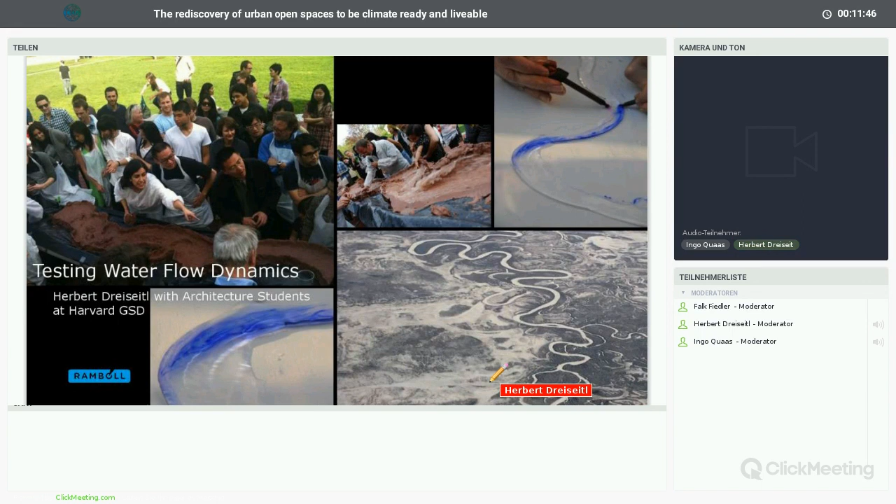Resiliency, what we are talking about today with being climate ready, is something we can actually learn from a very natural way of how water is streaming and creating a balance between too dry or too wet. It creates a kind of retention system. Rivers are never straight, they take a very long way. And when you look into the landscape before we get to solutions, we can see that landscapes in general have a very resilient structure.

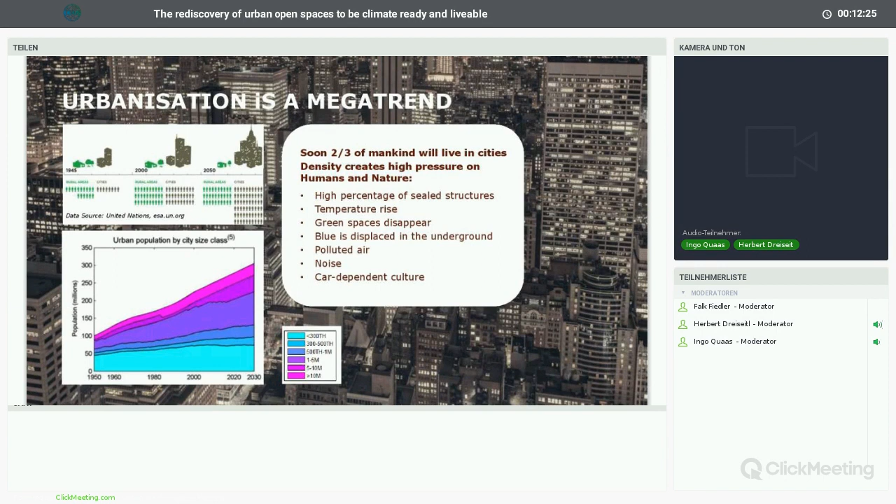Today in our cities, we have lost this intelligence of nature, and it's very interesting to adapt this logic we see in the natural environment and bring it into our cities. The big challenge, as we know, is that more and more cities are getting more dense, with more people living in cities. So there is a conflict of space, a conflict of using this space in a smart and clever way.

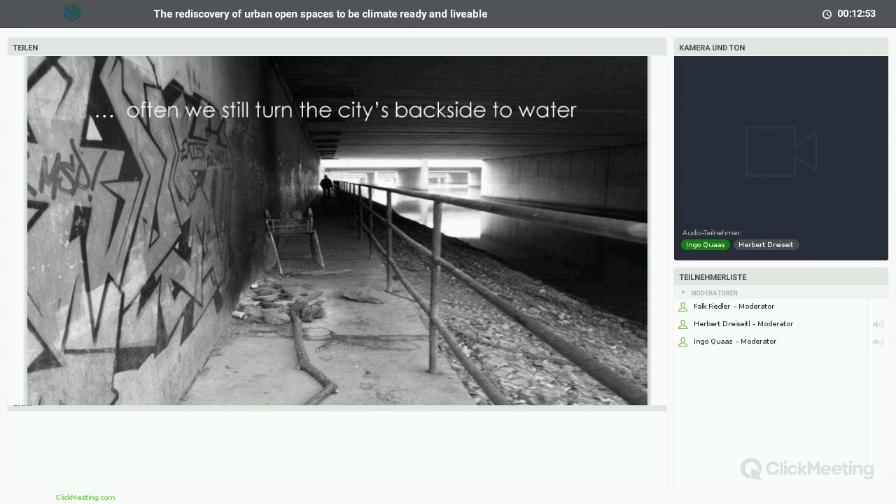It's often that we put the infrastructure, and of course the value of water and green, to the backside. It's something nice to have, but if we don't have the space, we ignore it or push it to the backside. I know that we need a totally different way of working, much more in partnership with the environment, even in our dense cities.

And the logic is very clear. If we look at the water regime of a natural environment, there is a lot of evaporation, a lot of cooling effect. If we go to agriculture, if we go to the urban fabric, we find direct runoff, a lot of pollution going into rivers. Especially here in the US, we have combined sewer overflows all the time, bringing pollution into our streams and rivers. We actually lose a lot of fresh water, and that is a real problem, a real dilemma.

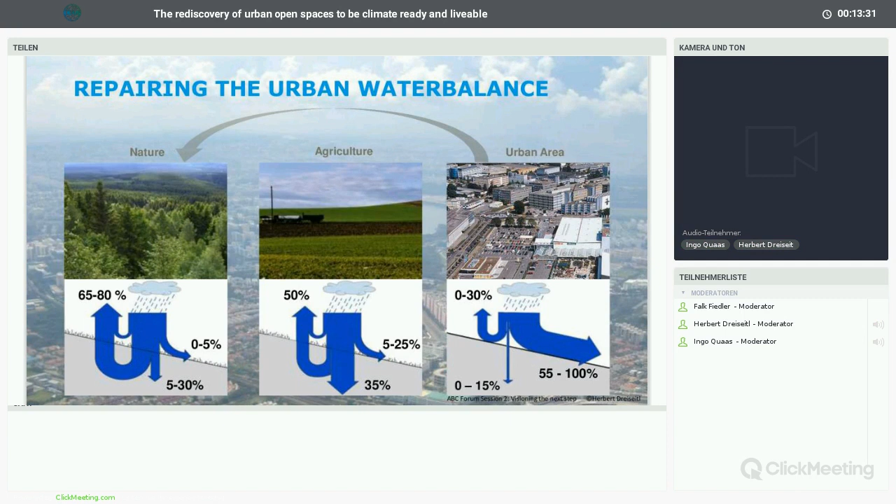If I may talk a bit about climate change, also from a US perspective, the average of all the research around the world is actually coming to the same conclusion.

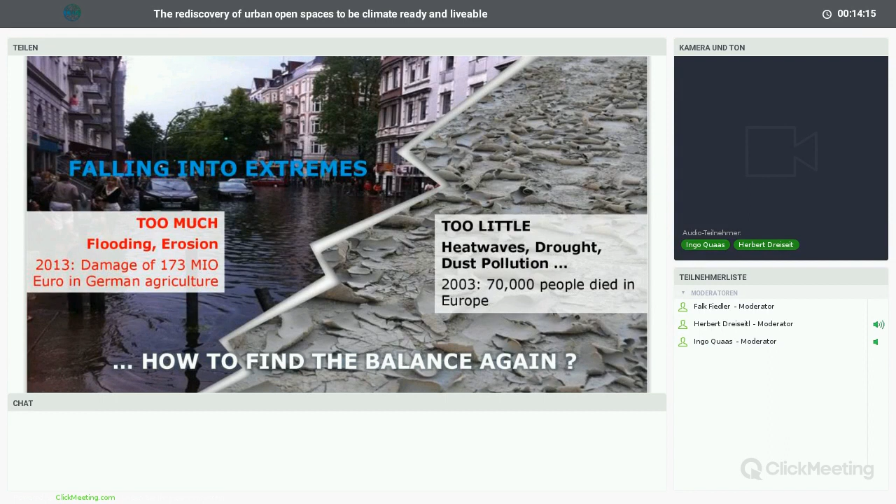Very often the average of rain is not so much different, but the intensity is changing. So we have, for example, on one spot an enormous amount of water coming down, and other parts with no drop at all. So we have to balance this much better. And I think this problem about going into the extreme in our cities is a very specific topic, which is also what people actually feel and experience in mega cities. And we have to find better solutions to that.

I'll give you one example. In front of my own office in Boston, we had four extreme storm events in a row this year, and we had the highest water level ever measured in Boston. It was in front of my office that the streets, the ocean came so high that the front part was completely covered with seawater, and it was so cold that some of the cars were frozen in this ice water.

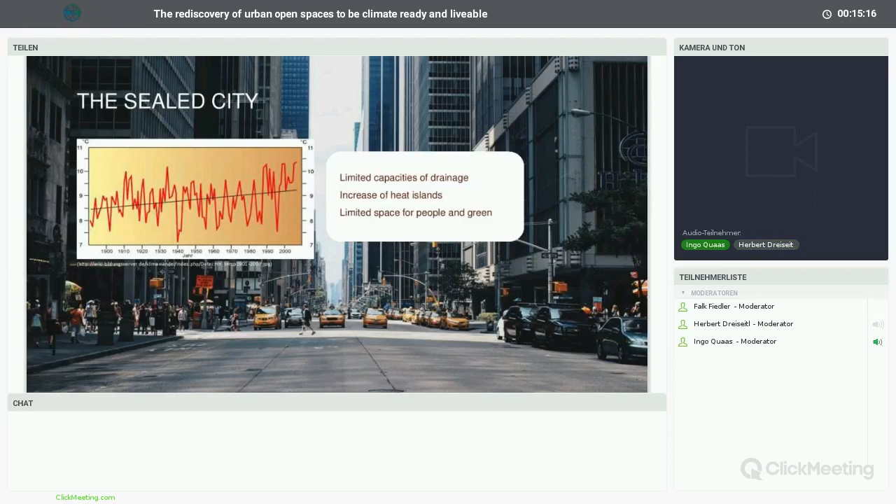So the reality about climate change and also the extremes we have, this is not something for the future. This is something which is actually happening right now, and people can feel that. So we have to find much better solutions. A lot of challenges are not only about too much water, also too little. Heat extremes in the US, we have the problem that we have air pollution, we have noise pollution. There's lots of things which are all reasons to create more healthy cities and to integrate better the water system.

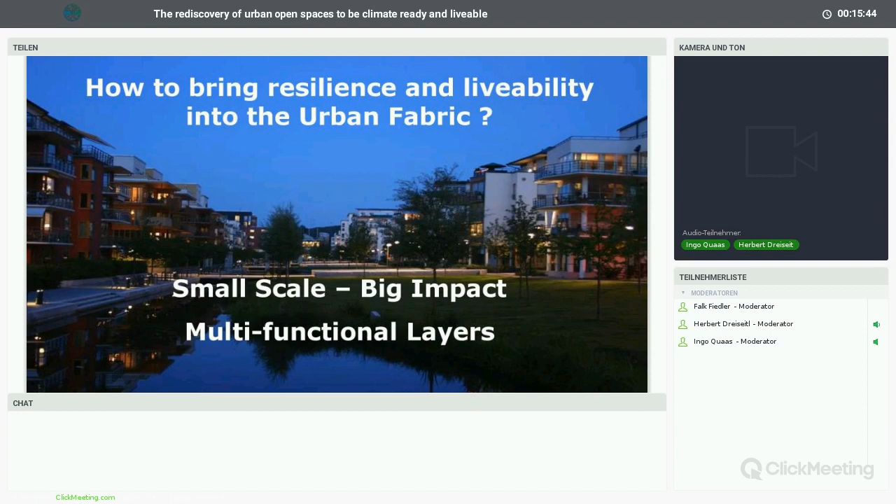I would like to give you some examples, maybe about our research and our attitude, how we work in this field. We're trying to find solutions on small and large scale. And actually what it is about is using any opportunity in a city, whether it's a little pocket park or a large infrastructure, or also streets, to be more adaptive, more resilient to what is happening and to balance the extremes.

For example, instead of using everything underneath in pipes, to use the city in itself, starting from the rooftops to the street scale, also very often small scale projects, to do the homework in front of our doorstep and not to put everything at the end of the pipe solution. So that is a very important part I think we have to come up with.

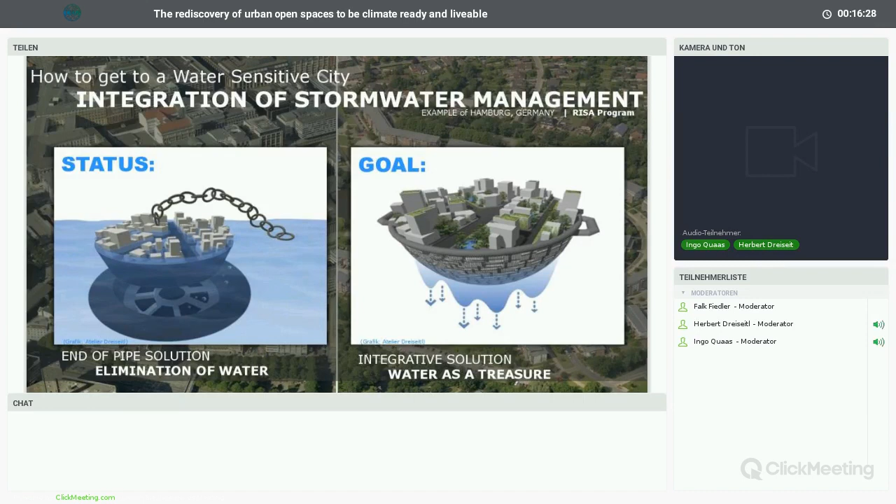And I'd just like to illustrate this very simply with some graphics. The traditional gray engineering is basically: we want to get rid of water, we want to bring it into pipes out of the city. We have treatment maybe at the end if it's a combined or separated sewer system. And we use basically the city as a drainage system to get rid of water. I think in the future, we have to get a more integrated approach, to decentralize our systems and to use the intelligence of nature and bring it actually back into our cities.

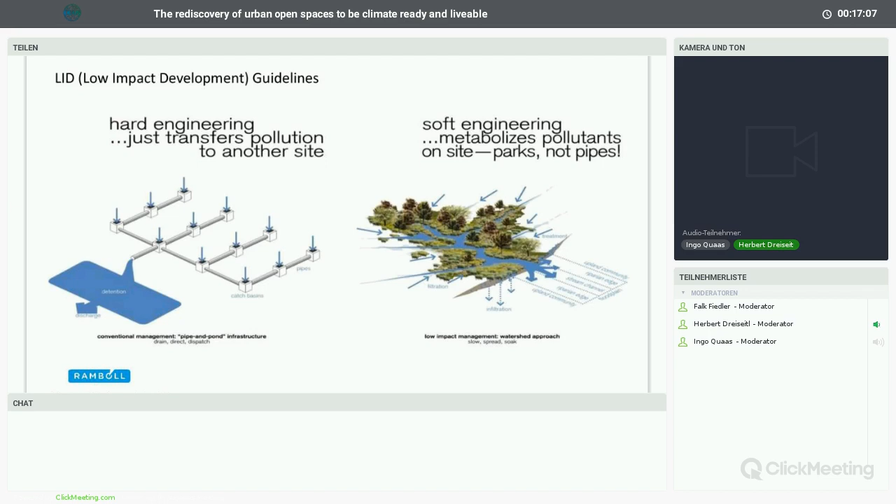Let me just explain that very simply with one example. I take here Singapore. I was very influential in Singapore for the ABC water guidelines, and our entire team was very intensely working for the last 10 years in the city. We came up with basically the guidelines for the entire city. What we are trying to do is collect every drop of rainwater in the city, bring it not only on the surface, but also treat it in different ways. We'll come to that. But collect it, and also store it, and recycle and reuse it.

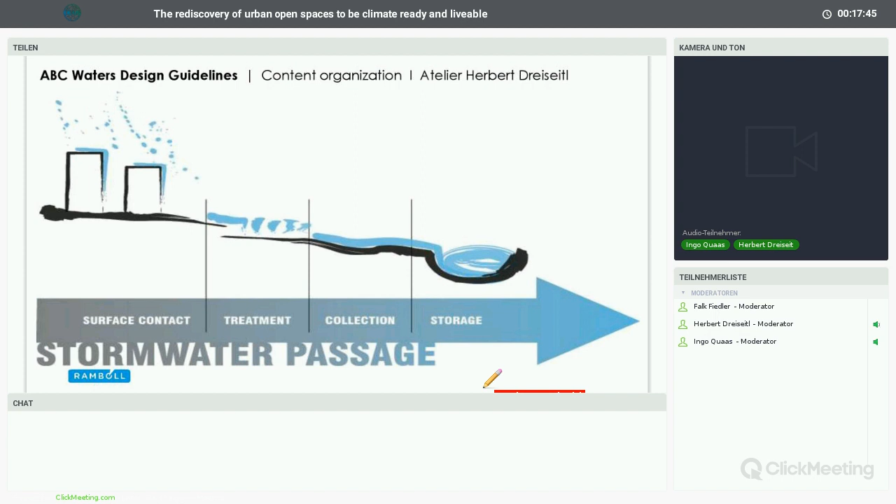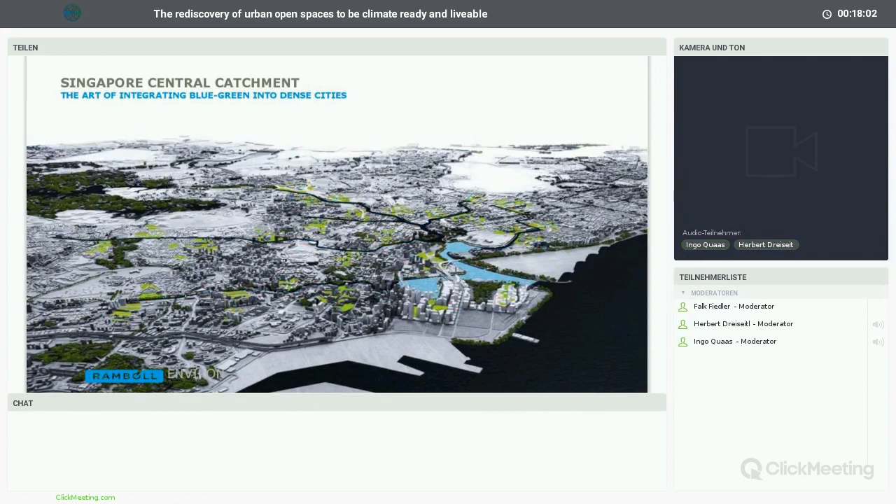Singapore is doing a big job to collect every drop of rainwater in the city and is using actually every drop in the city as a capacity to finally bring the water clean into a lagoon system, and from this lagoon system we use it even as a drinking water capacity. This is something which has to be done now on many different levels.

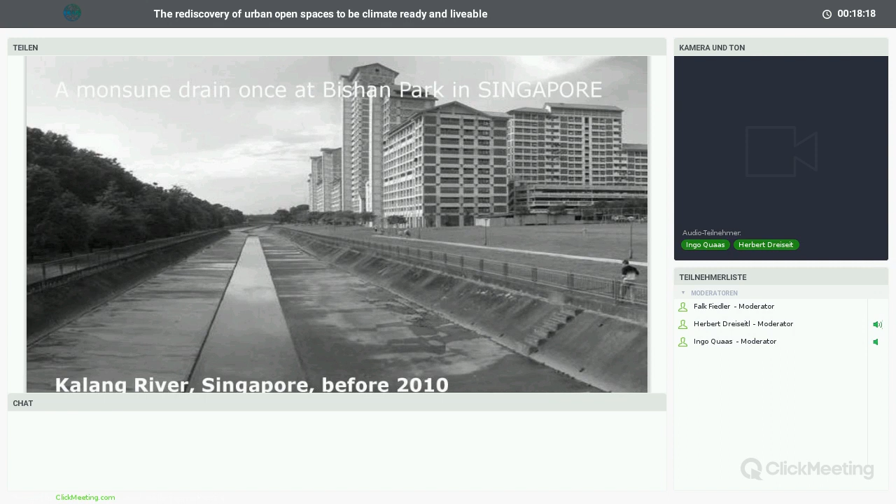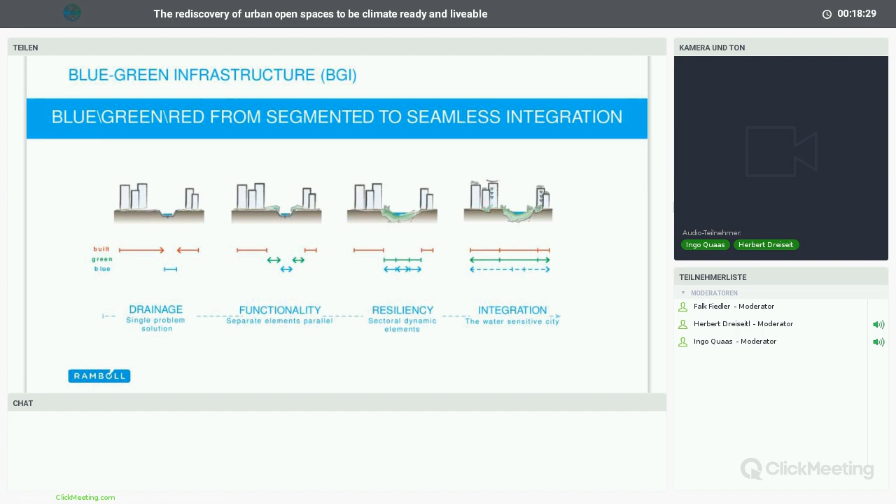The ABC water guidelines in Singapore start on reopening and changing canals and streams, and I'd just like to mention a bit about how we do that. Instead of having everything in drains to get rid of the water as quickly as possible, we have to get to a more integrated approach. And we have to find any opportunities, starting from daylighting forgotten streams, bringing them into the city in different ways.

And that means we also have to create ways to really make from concrete gray solutions a more integrated blue-green solution. In this case here in Singapore, we even start to use a lot of different parks and open spaces. We recycle material and reuse it, for example here. We bring bioengineering techniques, which we also use a lot in Germany on restoring streams instead of concrete, to use living material and plants to stabilize and avoid erosion.

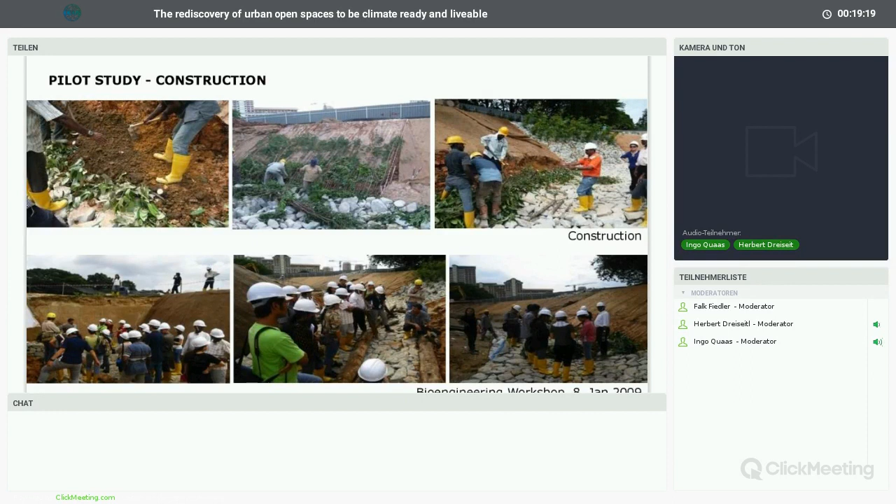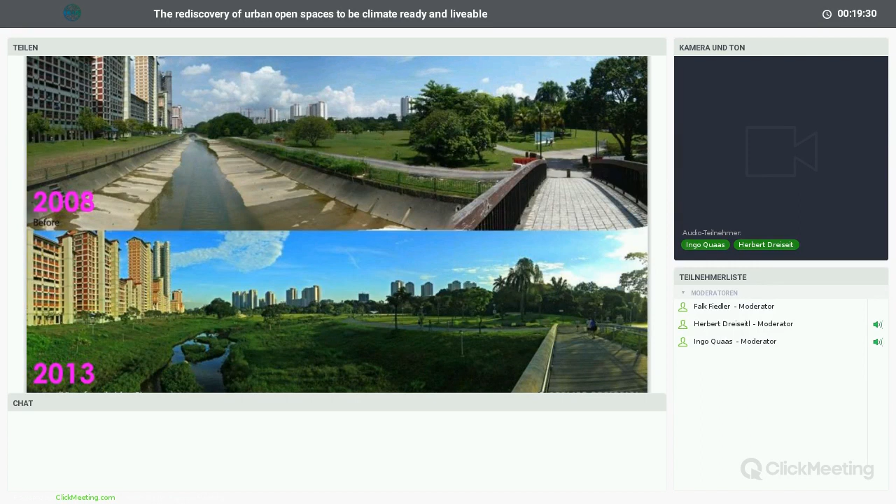We are doing this on a large scale here in Singapore, and we actually change a lot of these infrastructure systems completely from a gray to a more integrated blue-green infrastructure. Well, this has many effects. On one side, we can hold back an enormous amount of water when it starts to rain. Singapore has monsoon rains which are unbelievable, nothing to compare to our normal big rain showers we have maybe in Germany. We have to capture this water in the city and slow it down. The side effect is also that the city gets much better from a climate, microclimate aspect.

People really love this kind of environment. I'll give you some impressions. This is after a big storm event where we can actually flood the entire region. We have a special safety system so that people actually leave this place and go out.

We use the city park as a big retention and detention facility to slow down the process. Two days later, this can be used again—it's a multifunctional, flexible space where people get close to water and experience its beauty, so people aren't only afraid of infrastructure and hiding everything away, but integrate it into day-to-day life.

I'll give you this example. A lot of people who grow up in cities, children, have very limited access to the natural environment. They live in air-conditioned systems, indoors. It's so important for them to understand how a natural environment works, and how we can make our city more sustainable and more livable.

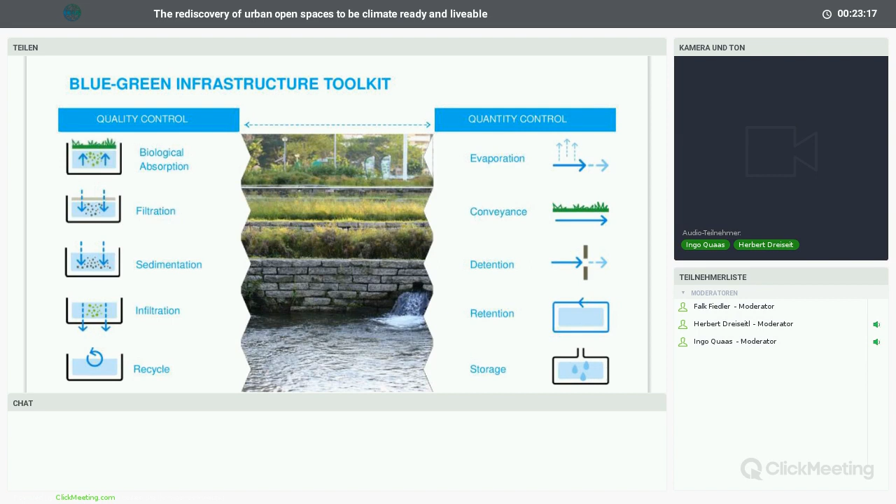A little more from an engineering point: there are lots of ways to work better with water and with engineering solutions. There are always two sides of the coin—one is working with quality, one is working with quantity. We have many opportunities, not only in parks but also on buildings, to work more strategically and cleverly to bring together functions like filtration, sedimentation, conveyance, slowing down the process, and storing it. I'll give you one example.

You can start on buildings, and we've done that at large scale. I worked with Renzo Piano on Potsdamer Platz in Berlin. What most people don't know is that this was, at the time, the largest project in the world for an integrated stormwater and rainwater management system in a city.

At Potsdamer Platz, we have more than 50% green roofs—extensive green roofs—where we start to filter water. From there, the water goes into cisterns, and we recycle it for toilet flushing, for shopping malls, and for greenery.

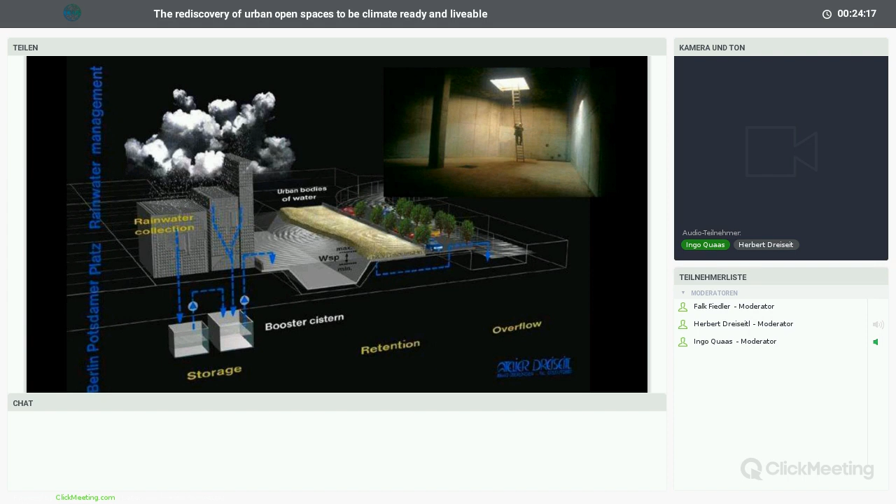The rest of the water goes into a lagoon system. The lagoon has flexible water levels: when there's a lot of rain, the water level goes up; in a dry period, it can go down. It's a very interesting and efficient way to hold back and use water more carefully and make more sense of the environment.

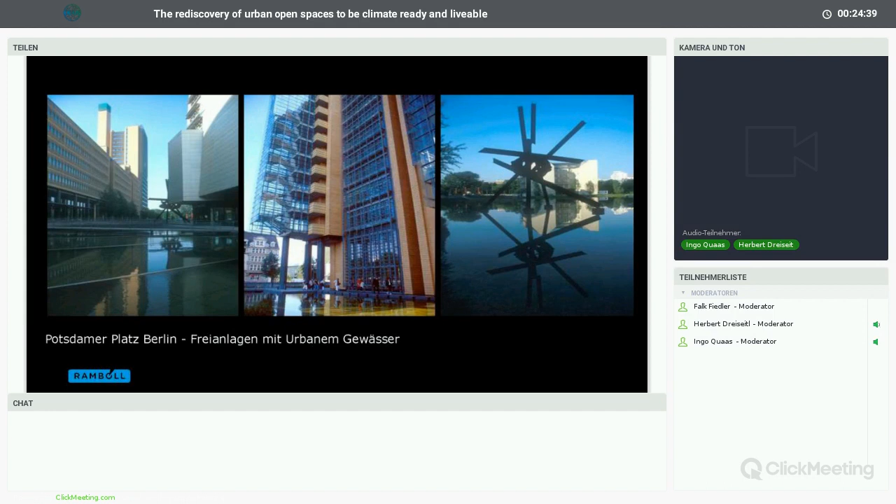Potsdamer Platz has, of course, a very extreme design solution—you can't do this everywhere. We have open lagoons fed only by rainwater, with a special filtration system where we circulate the water in summertime. We don't put any chemicals into it; we use the natural filtration system instead.

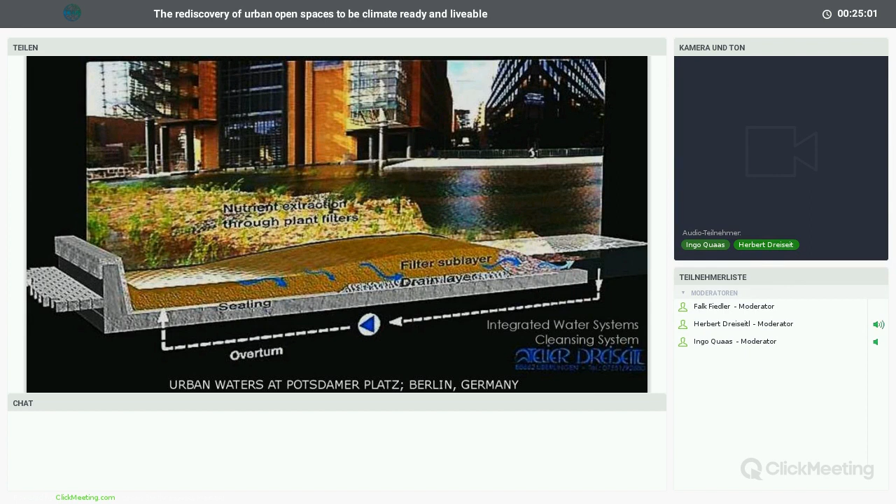It's a cleansing biotope, where the water is filtered through a substrate, and the plant material and root system, along with microorganisms, do the job of cleaning the water.

This kind of integrated approach can also be beautiful, and that's a very important part. That's also what we try around the world when working on brownfield solutions—to celebrate, not just have technical solutions to solve a problem, but to turn the problem around and make it a solution that brings new possibilities into a city.

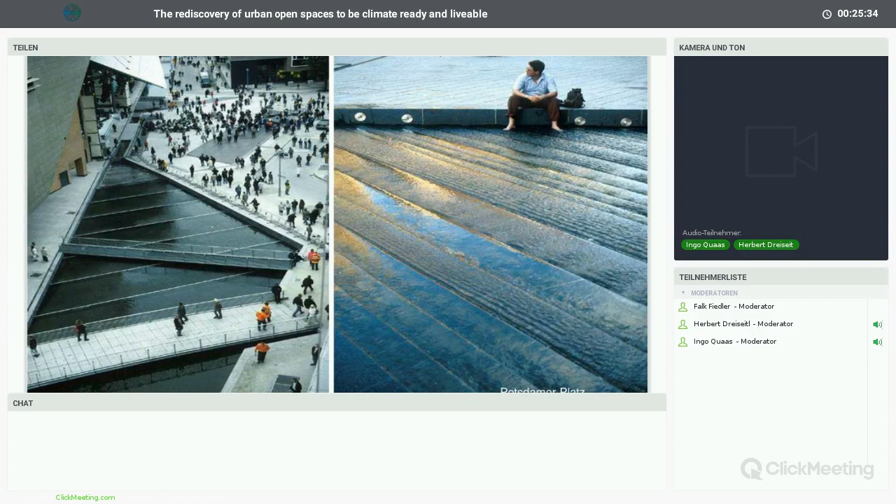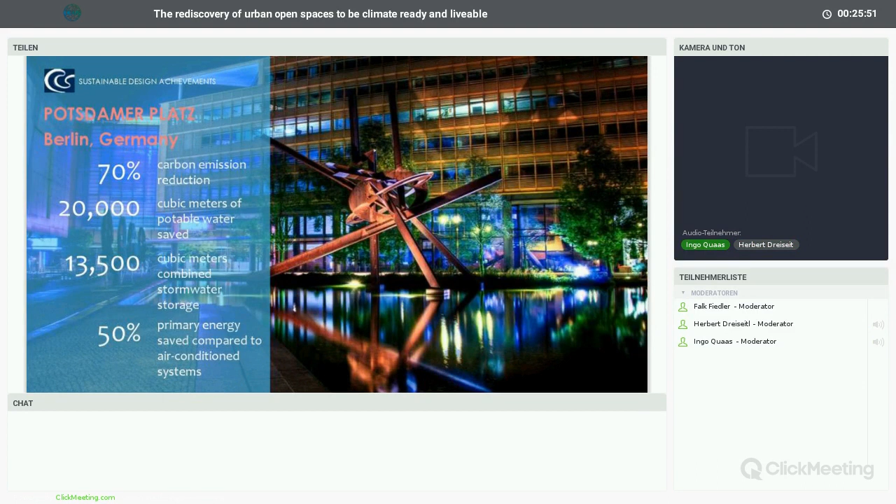You can do so much better, bringing beauty and engineering together, being smart about energy, combining recycling systems, and reducing the carbon footprint of our cities.

I'll give you one example here from Tanner Springs Park in Portland. That was also a pilot project. This was actually very much a brownfield site.

Portland, a typical, very interesting city in the US, one of the most green cities in the US. They had a town center, the typical grid, and a big part of the city that was totally just industry, rails, shops, and so on. We changed that Pearl District completely, and I'll give you one example of what we did.

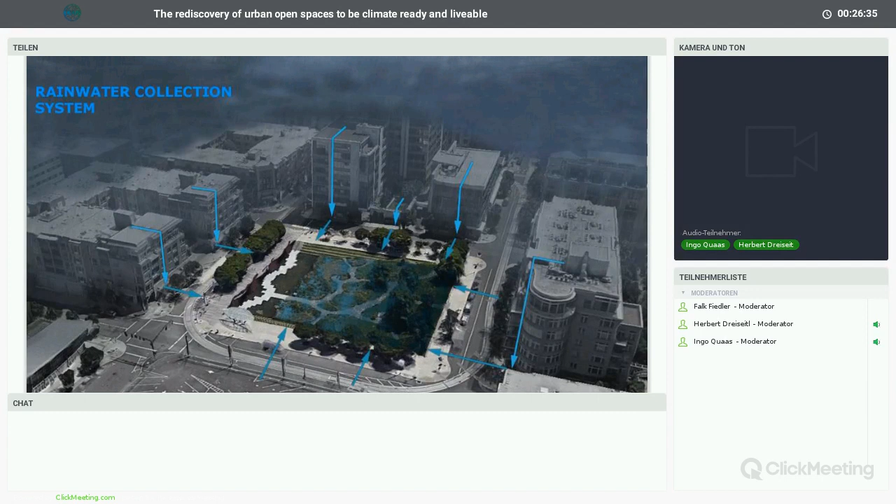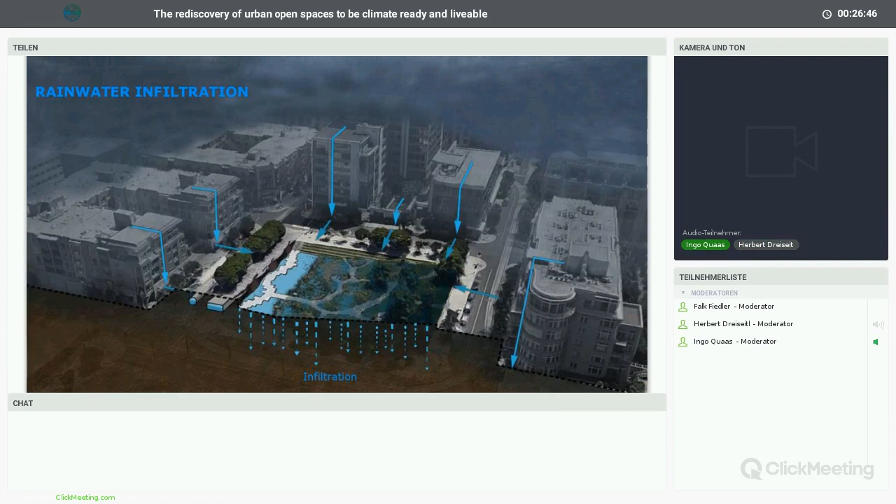All the new buildings, and sometimes also recycling of old buildings, are collecting and capturing water, and we bring it into a public park. This public park has different functions, of course, evaporation and infiltration, and we can circulate the water in this park, and finally we bring totally clean water out.

What is very important on such projects, because it's the public realm, you have to get the people on board. This is something I've been doing with my teams for many, many decades and years. We try to involve the local people in the decision, even in the design process.

Here's a stakeholder involvement project where we had 300 citizens from that area. We had an open workshop where we created a kind of vision for the future of this Pearl District with the local people.

If you involve people, not just giving a nice show, but really let their voices, dreams, and visions come up in discussion, and empower them to be exposed to new ideas and also create new ideas, you will have a much better political background. That is very important for politicians to make decisions, and also very important for stakeholders to be involved and to finance such projects.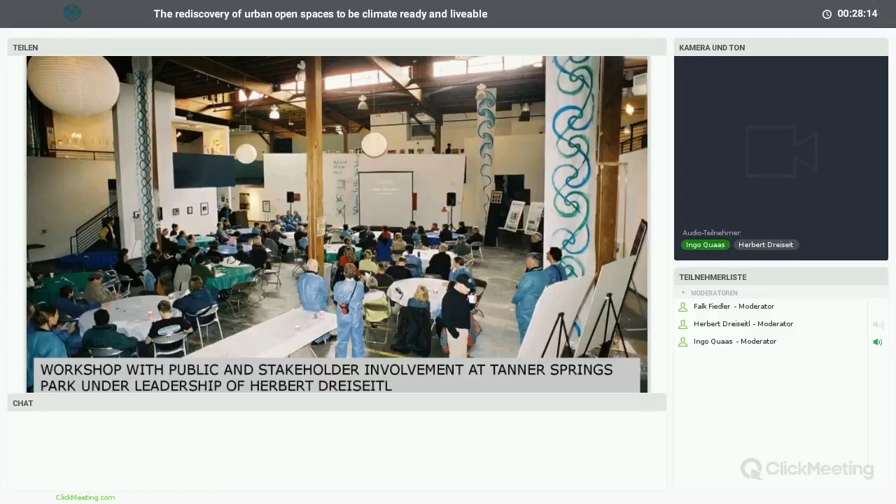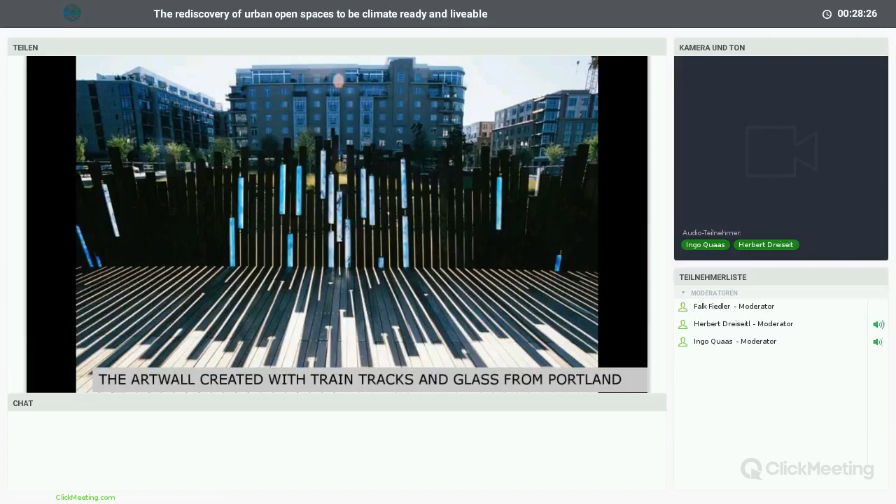There's a lot I could say about that, but I'd just like to mention that this project was very much about stakeholder involvement and city involvement. We even recycled a lot of the material, including the old train tracks, turning them into an art piece.

People love this park. People have taken ownership. Interestingly, there's a whole group of volunteers who clean up the park, so we have much less maintenance costs than other parks. Teachers are using this for open classrooms, like clean, green classrooms outside.

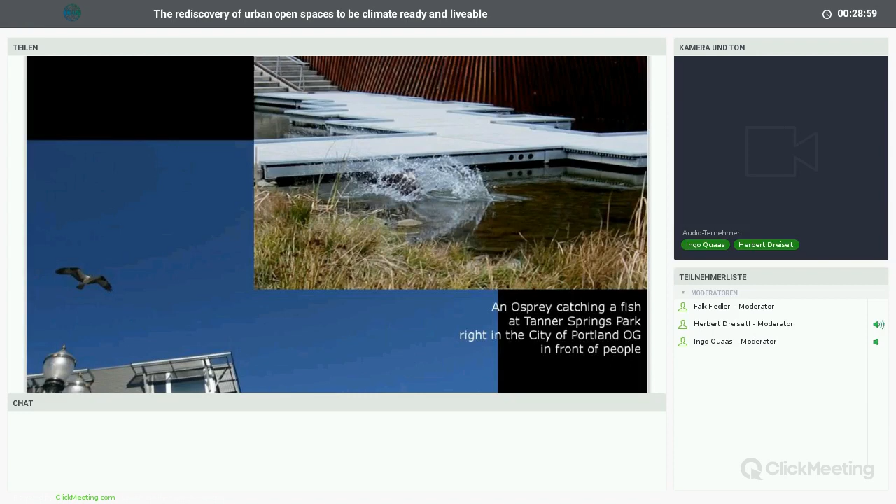We can even find ospreys catching fish in this park. So it's a very interesting way of bringing a modern park and also nature back into the city. You can even see art performances on weekends sometimes. It's a very dynamic and interesting integrated solution.

Finally, I'll give you a short intro about what we do with solutions based on cloudburst projects. We are working here in the US on integrating engineering solutions, like here where we're working for New York City, for Queens, to come up with integrated approaches.

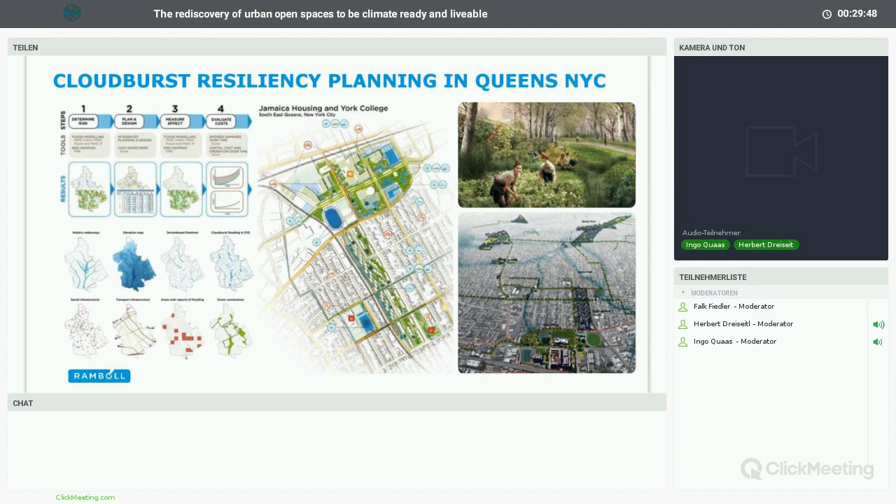We do cost-benefit analysis. We work on the question: if a city invests in green infrastructure, how can they save money in the future where they usually have problems otherwise?

We often do this in our teams here in the US with brownfield recycling projects, in a very simple way. We make sketches, often on site with people, showing how things could look, which gives a very interesting integrated process in the planning.

We also work on resilient coastal solutions. This one is a project where we're working in Washington. Washington is very much in danger because of sea level rise, as a lot of the area can be flooded. So we create a kind of living seawall, combined with an integrated approach to stormwater management.

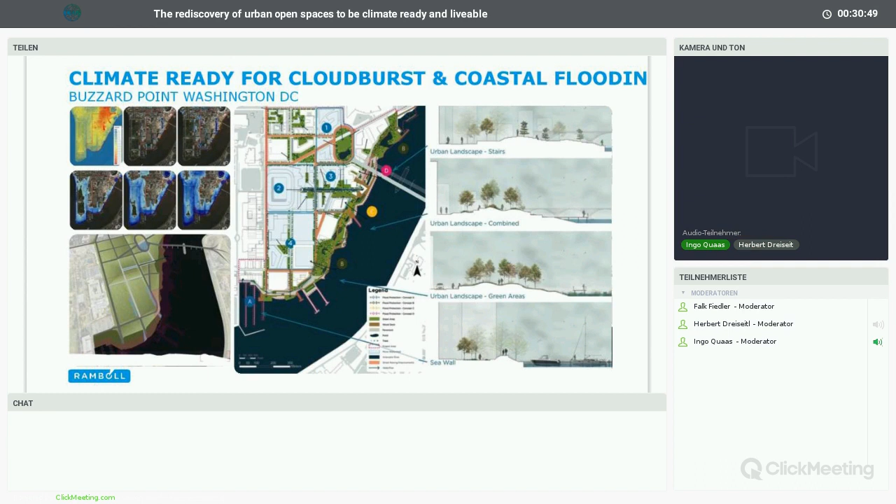This is a very interesting way to work. What is important, especially here in the US but I think also around the world, is how to invest budgets in the most clever way.

It is very expensive for cities in the future if they do nothing, and you can actually show and calculate that. If you're going to invest in better infrastructure, you should do it now. With our cost-benefit analysis, we really count the co-benefits, the added value that infrastructure can bring to cities.

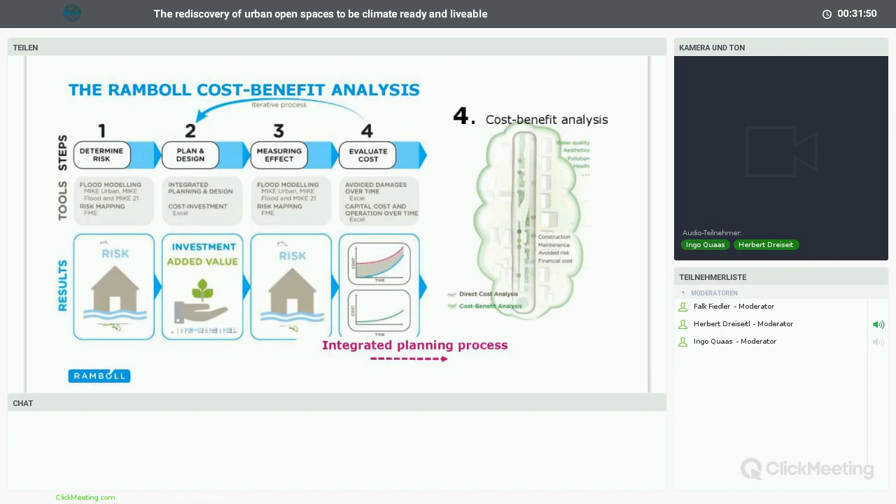We encourage investors who are usually not willing to invest in such things, but who would get a lot of benefit. We look very much for public-private partnerships, so they can see where their value is and how wise it would be to invest at the right moment. That is a very successful way to work.

And you can also show what would happen if you do nothing in the next years. Where would be the damage, the floodings? What would be if you invest in different solutions? And of course, you have to find the optimum.

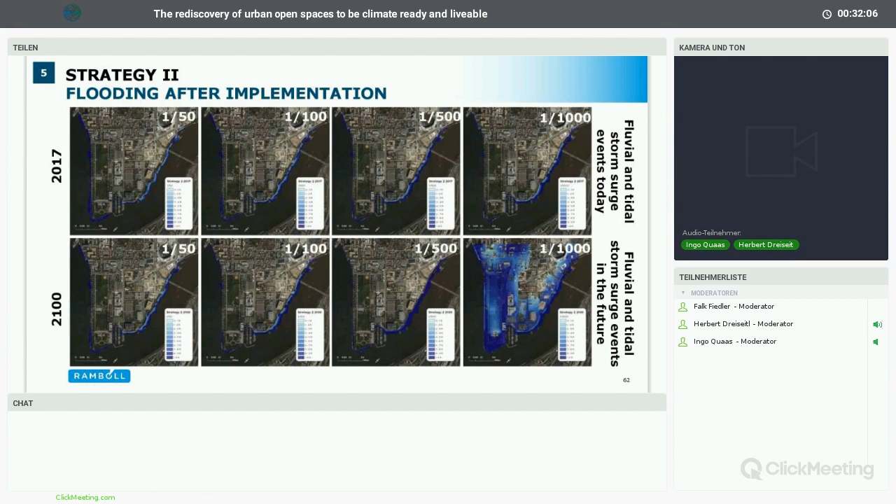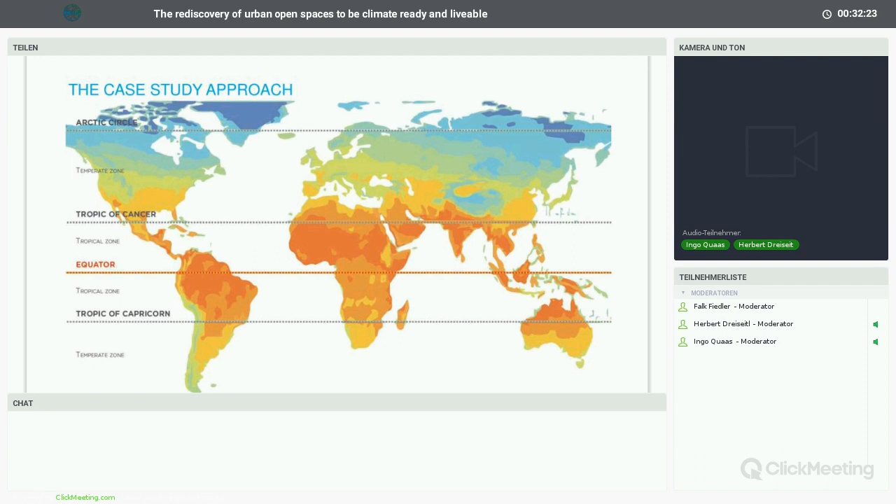That brings me to the last slides, and let me talk a little bit about our research work. We are very strongly connected, and I'm personally doing a lot of research with my wife in the field of blue-green infrastructure around the world. We did a research work funded by the Ramboll Foundation, which is actually a very interesting way - we are owned by a foundation, so we can work in many different fields.

We compared European, American, and Asian solutions, and we wanted to figure out, is there a difference in decision processes? What are the conditions to make projects work, and what are the constraining conditions that keep projects from coming about? It was a very interesting result.

We figured out whatever regime you have, it's very, very similar - the problems and the solutions look very much the same in the different fields. I'll give you one example.

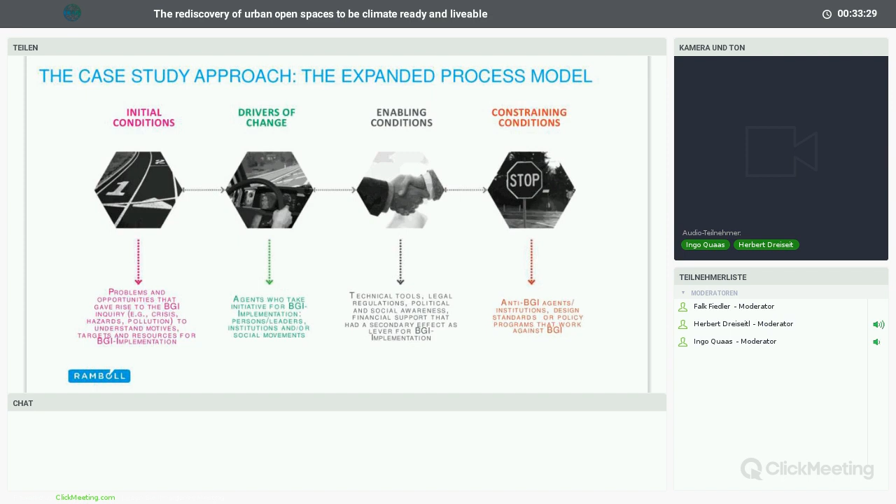We looked very much at the initial conditions and also the constraining conditions. There's a very important part of that decision process that we usually only look at through real estate development, but the real values of blue-green infrastructures are in many different fields.

This research work was done by Harvard GSD, MIT in Boston, then in Germany the Zeppelin University in Friedrichshafen, and my university where I'm professor, the National University of Singapore. So we brought real European, Asian, and American examples together.

We started with the different forms of capital building. It's very interesting in the discussion about investment in better infrastructures and brownfield recycling or development - we have to look not only at the specific site and real estate development on financial capital, but also at the added values to human health, to built capital, to environmental topics, to social capital, and to symbolic capital. That is getting more and more important.

I'll give you one example. A lot of American cities are very much run down. They have problems getting young people into the cities. The symbolic capital means it's the image of a city, and the image is very much connected to good city planning, open space, and very good integrated solutions.

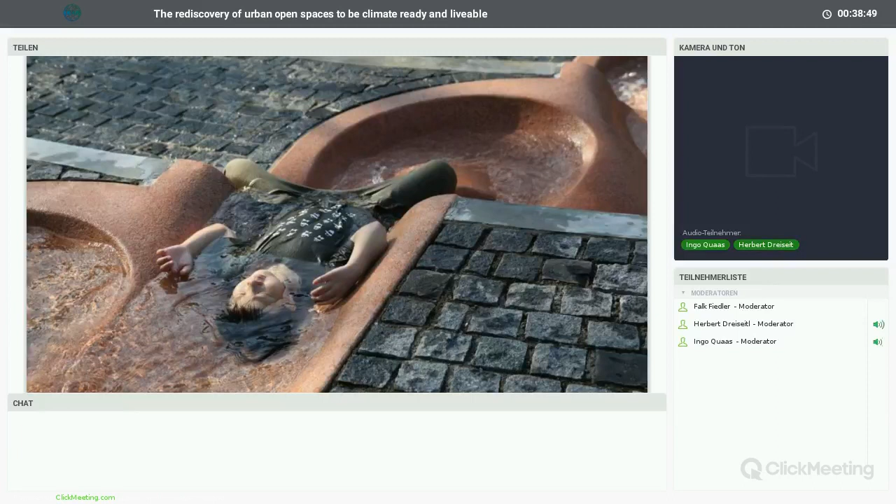In my project, I'll just show this as the last one. I was so impressed about children in Singapore in our new projects, how they play. This little boy putting his body into a little water stream experiences what it means if you can make retention or detention and hold water back, and he loves it, he really enjoyed it. I watched this little boy for at least half an hour, and I took some pictures. It's really fascinating.

Well, I think that is from my side. I don't want to go over time, and maybe there are some questions. You can contact me any time at Dreiseitl.de. There's much more detail on the different topics of course, but this should give you a little bit of an overview of what I think is probably very much the future, what we have to do in our cities.

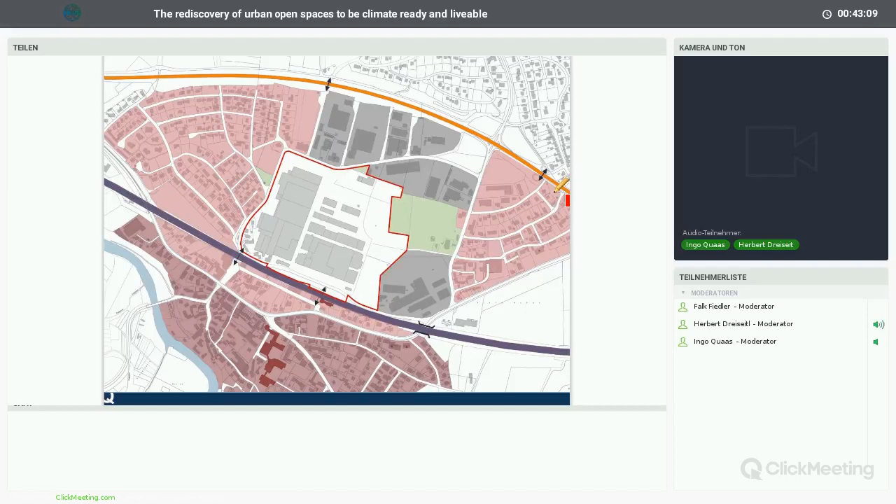One actual example from our own experience, where I managed a competition for European town planners and landscape architects by order of a small community in Bavaria, for Mainleus near Kulmbach. Maybe someone knows the famous beer, Mönchshofbräu from Kulmbach. The subject was the area of a former spinning factory with a dimension of 14 hectares, located in the north of the small historic village near the river Weiser Main, surrounded by different dwelling and industrial areas, and also a local sports center nearby.

The task was to develop a long-time concept of revitalization of this brownfield as a new urban or rather rural area for living, working, and recreation, also taking into consideration the actual challenges of the Energiewende and climate change.

In the end, 16 teams took part in this urban design competition. Last week, the session of the jury took place and decided who the prize winners are. There are a commendation, or recognition, and 3 prizes. And there are 2 reasons why I chose this example.

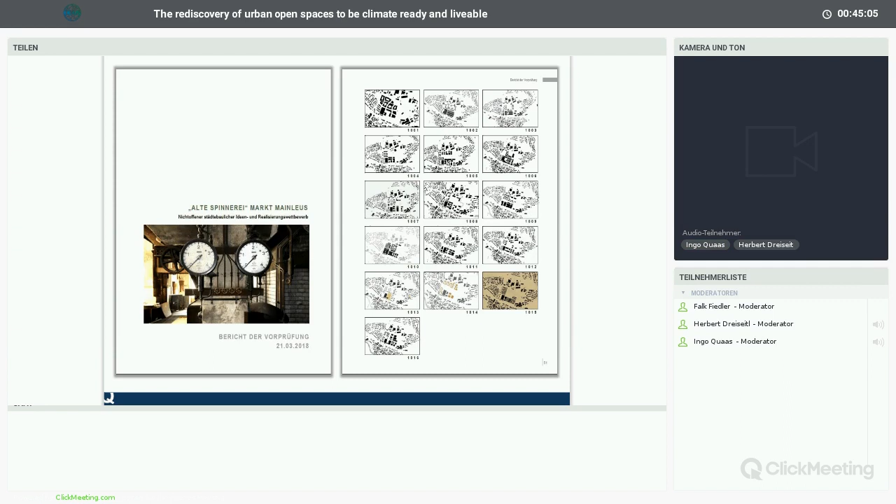Going back to the pleading for competitions, the principle of competition works also in small or medium towns and for seemingly simple tasks. But most local authorities in small and medium towns often don't know about this opportunity. That's why, for example, the Chamber of Architects in Thuringia advertises competitions as an established instrument for high-quality Baukultur, as we call it in Germany, or high quality in the culture of planning. The diversity of solutions, 16 different solutions for the same task, is always unexpectedly large, especially from the perspective of local authorities. They are often amazed and pleasantly surprised.

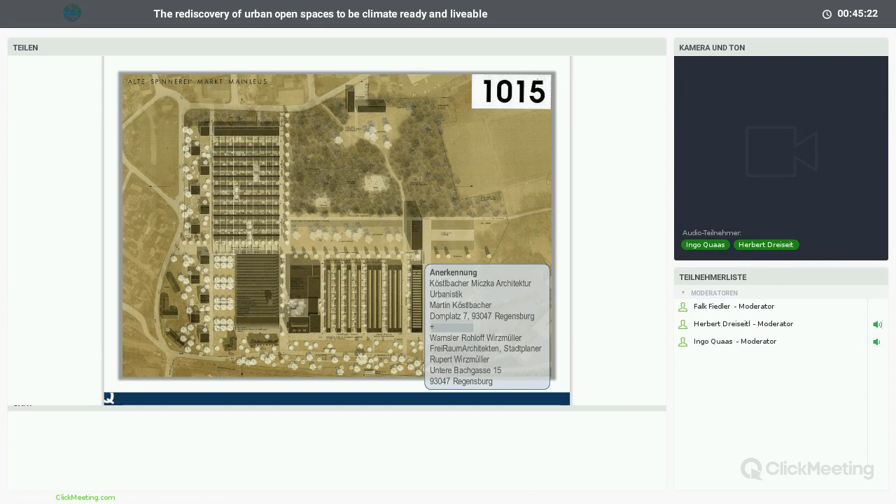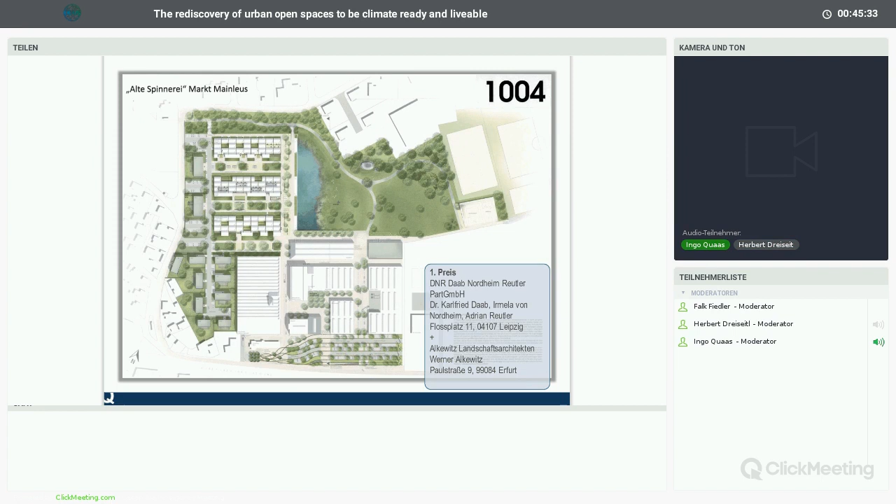The second reason is pleading for lively open spaces. If I show you the four prizes, the praise, the third prize, the second prize, and finally the first prize, you see lively open spaces also in small and medium towns. There's still a demand for well-designed and variously usable open spaces, respective to the spirit of the place, and an increasing demand for climate-ready and livable open spaces also in these small and medium towns. Because of the proposal of working places and diversity of housing supply, the quality of open spaces in town, in the neighborhood, and in the surrounding region becomes more and more important for people deciding where they will live.

At the same time, the question of economic efficiency becomes more and more important for communities which have to build and maintain public open spaces, especially with a view to the challenges of climate change and, for example, storm and heavy rain as shown before.

There's also another aspect, this is the last chart, which I can show in this example. From the point of view of the communities, not only the result at the end of a long-term development is important, but also the way to achieve this final stage. So we also ask in this competition for the phases necessary to get, step by step, acceptable situations, especially for people who are able and willing to take first steps with investment or leasing a dwelling house or a trading area. That's why I wanted to show on this example the opportunities of competitions to find the best solutions, and also the planners for such a task in a small or medium town.